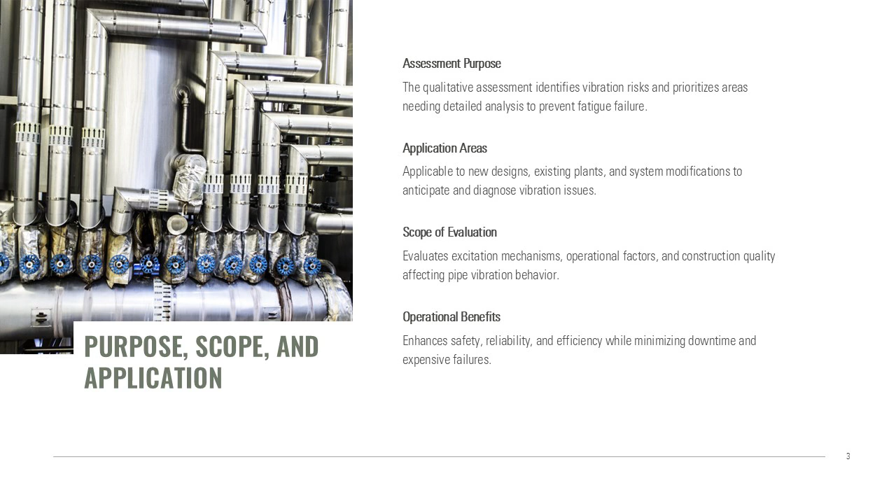The scope of this methodology includes evaluating excitation mechanisms, operational factors, and construction quality, all of which influence vibration behavior. By systematically applying this approach, organizations can enhance safety, reliability, and operational efficiency while minimizing downtime and costly failures.

Assessment methodology, excitation and condition factors. The methodology for qualitative assessment combines two primary sets of factors, excitation factors and condition/operational factors. Excitation factors include mechanisms such as flow-induced turbulence, pulsation from reciprocating machinery, cavitation, flashing, and surge caused by fast-acting valves. Each factor is scored as high, medium, or low based on its potential to induce vibration.

Condition and operational factors, such as construction quality, maintenance effectiveness, cyclical operations, and frequency of process upsets, are also evaluated and assigned a score. These scores are aggregated to identify critical areas requiring further analysis. The process involves reviewing design documents, operational history, and conducting visual inspections for existing plants.

Flowcharts provided in the guidelines illustrate how these factors interact to produce a prioritized list of systems for quantitative assessment. This structured scoring system ensures consistency and objectivity, enabling engineers to focus resources on the most significant risks.

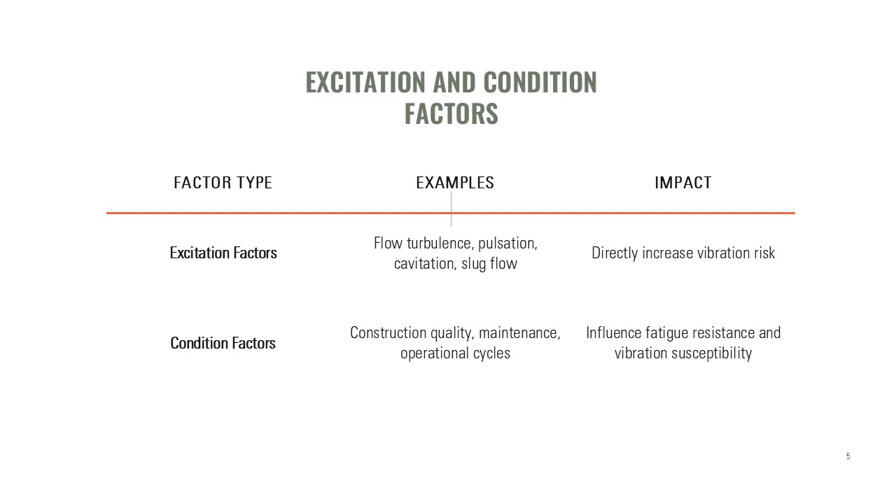Excitation factors. Number 1, fluid kinetic energy. Meaning, higher fluid velocity or density increases energy in the flow. Why it matters: creates stronger turbulence, leading to higher pipe vibration risk. For gases, leading to larger pulsation forces. For liquids, leading to higher surge pressure during valve closure. Special note: sometimes the highest fluid kinetic energy comes from bypass/recycle lines that don't appear on PFDs. These should be checked.

Excitation factors. Number 2, choked flow or sonic velocity. Meaning, gas reaches sonic velocity at restrictions, valves, orifice plates. Why it matters: produces high-frequency acoustic vibration. Shock waves may form downstream, causing acoustic fatigue.

Excitation factors. Number 3, rotating or reciprocating machinery nearby. Meaning, pipework connected to or close to mechanical equipment. Why it matters: reciprocating machines create strong mechanical excitation. Rotating machines may also transmit vibration. Rule of thumb for close: offshore, same deck or module, above or below. Onshore, within radius equal to skid length.

Excitation factors. Number 4, positive displacement pumps or compressors. Meaning, equipment that pushes fluid in pulses. Why it matters: can generate significant pulsation-induced vibration. Even screw compressors sometimes show pulsation issues.

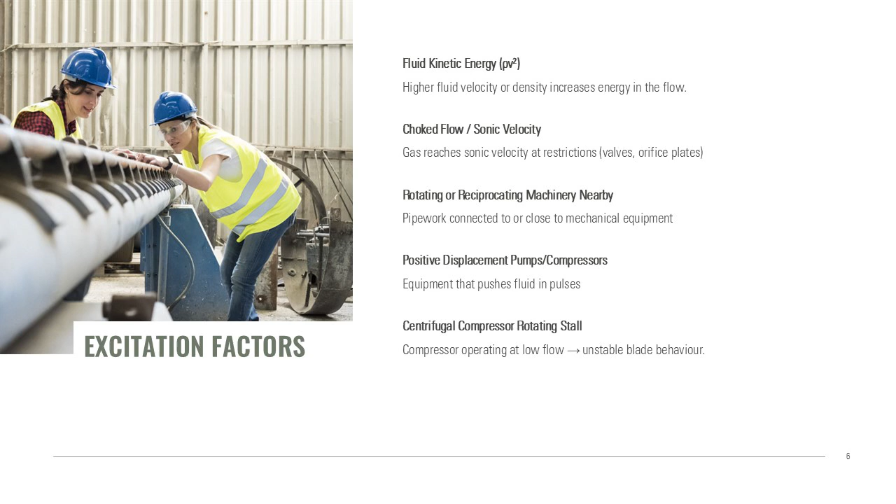Excitation factors. Number 5, centrifugal compressor rotating stall. Meaning, compressor operating at low flow, leading to unstable blade behavior. Why it matters: produces pressure pulsations, leading to high vibration risk. Note, vibrations may occur when operating near surge line unless anti-surge controls work properly.

Excitation factors. Number 6, cavitation or flashing. Meaning, liquid turning to vapor due to pressure drop or temperature increase. Why it matters: flashing, sudden volume change, leading to transient vibration. Cavitation, collapse of bubbles, leading to intense vibration. Check areas with significant pressure drops: valves, orifice plates, pumps, fluid mixing points, increased temperature approaching vapor pressure.

Excitation factors number 7, fast-acting valves. Meaning, automatic valves that open/close quickly. Why it matters: fast closure in liquids leads to surge pressure, high transient vibration. Fast opening leads to sudden momentum change. Valves to assess: ESDV, FCV, PCV, fast closing, BDV, RV, fast opening. Manually operated valves can be ignored.

Excitation factors number 8, intrusive elements, thermowells, probes, etc. Meaning, objects inserted into the flow. Why it matters: may cause vortex shedding, leading to vibration and potential failure of the probe. Excitation factors number 9, slug flow potential. Meaning, liquid-gas multiphase flow with intermittent slugs. Why it matters: creates severe unsteady forces and transient vibration. Recommendation: seek specialist analysis due to complexity.

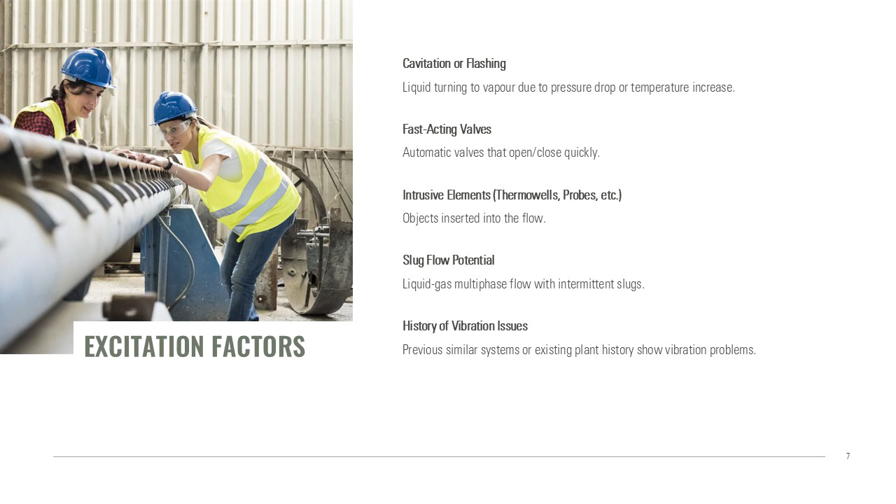Excitation factors number 10, history of vibration issues. Meaning, previous similar systems or existing plant history show vibration problems. Why it matters: indicates higher likelihood of repeat failures. Check whether previous corrective actions were effective and applied across full operating envelope.

Condition and operational factors number 1, construction quality. What it means: how well the piping was fabricated, welded, supported, and installed. Impact on vibration: better than industry standard, impacted to low risk. Well-built piping handles vibration better. At industry standard, impacted to medium risk. Normal construction may have typical weak points. Below industry standard, impacted to high risk. Poor welds, poor alignment, or bad supports greatly increase vibration fatigue risk.

Condition and operational factors number 2, maintenance and corrosion management. What it means: how well the plant maintains equipment, performs corrosion checks, and repairs defects. Impact on vibration: better than industry standard, impacted to low risk. Good maintenance prevents deterioration that could worsen vibration. At industry standard, impacted to medium risk. Typical maintenance: reasonable but not exceptional. Below industry standard, impacted to high risk. Corrosion, thinning, or loose supports can worsen vibration and lead to failure.

Condition and operational factors number 3, cyclical operations. What it means: whether the system experiences repeated operational cycles, batch processes, frequent flow or pressure fluctuations. Impact on vibration: no cyclical operations, impacted to low risk. Steady operation equals less fatigue accumulation. Yes, there are cycles, high risk. Repeated cycles cause recurring dynamic loads, accelerates fatigue.

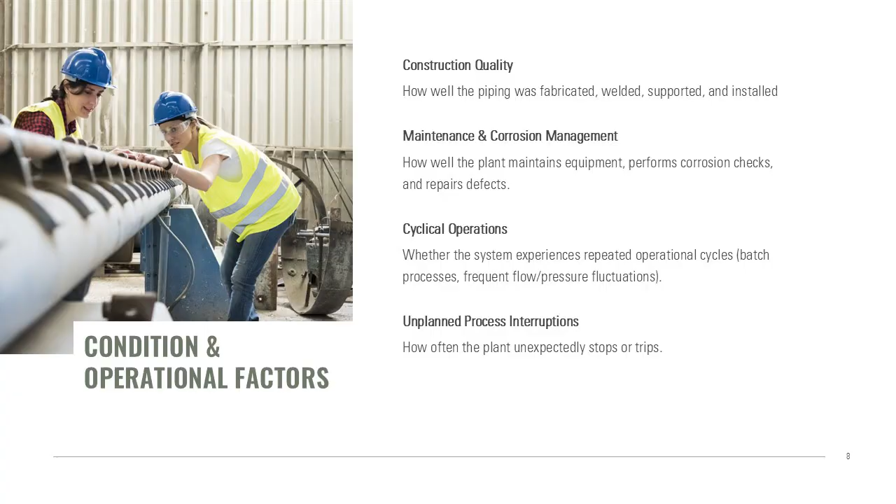New design considerations, existing plant and change management. For new designs, qualitative assessment focuses on predicting potential vibration issues before construction. Engineers should review similar projects and incorporate lessons learned to avoid repeating past mistakes. The assessment prioritizes systems that are safety critical or business critical, ensuring that these areas undergo detailed evaluation. Factors such as anticipated fluid velocities, machinery configurations, and valve operations are analyzed to identify excitation mechanisms.

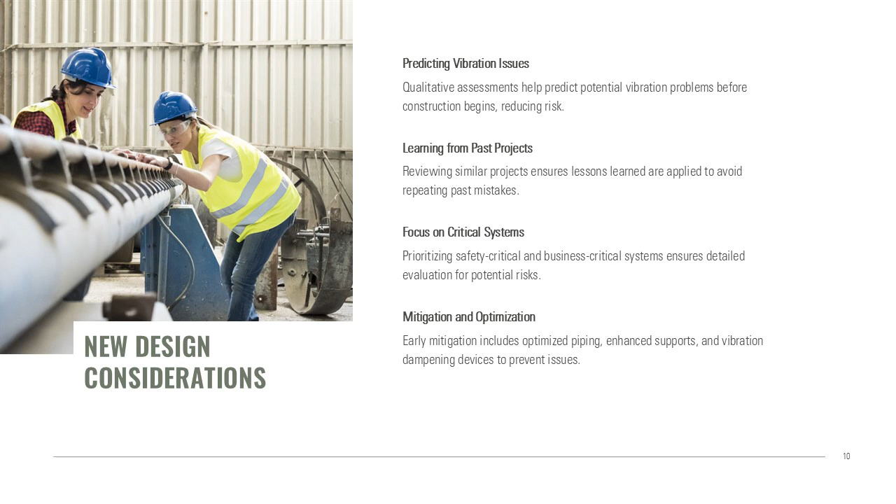By addressing these issues early, designers can implement mitigation measures such as optimized piping layouts, improved support structures, and vibration dampening devices. This proactive approach reduces the likelihood of costly retrofits and operational disruptions after commissioning. For existing plants, the assessment begins with a visual inspection to identify as-built conditions and any signs of vibration-related damage. Historical data on vibration incidents and corrective actions are reviewed to understand recurring issues.

When changes are proposed, such as process modifications or equipment upgrades, the assessment evaluates whether these changes could introduce new vibration risks. This includes analyzing variations in flow velocity, fluid properties, and operational configurations. The process integrates with HAZID and HAZOP studies to ensure comprehensive risk management. By systematically addressing these factors, operators can maintain plant integrity and prevent failures during operational changes.

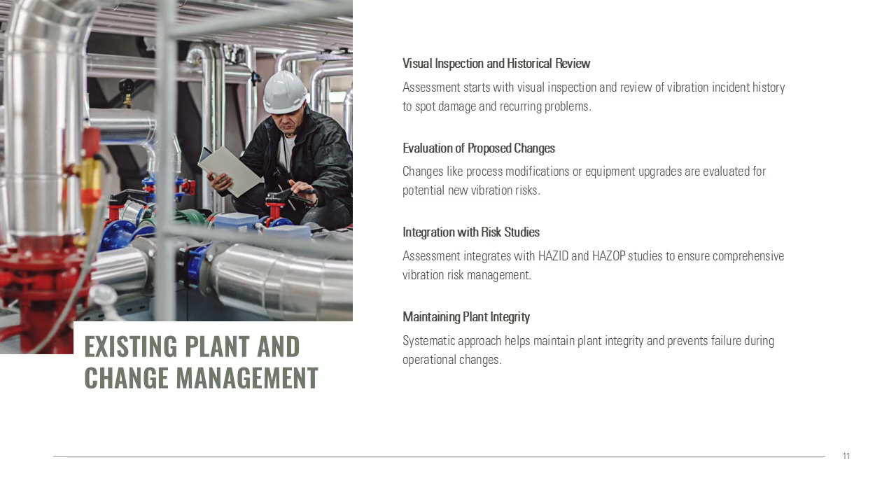Key excitation sources, condition and operational influences. Excitation sources are the primary drivers of vibration in piping systems. These include flow-induced turbulence, which occurs at high fluid velocities, and pulsation from reciprocating or rotating machinery. Cavitation and flashing in liquid systems can generate transient vibrations due to sudden phase changes. Fast-acting valves, such as emergency shutdown or blowdown valves, can cause surge forces and momentum changes. Intrusive elements like thermowells may lead to vortex shedding, while slug flow in multiphase systems can create severe dynamic loads.

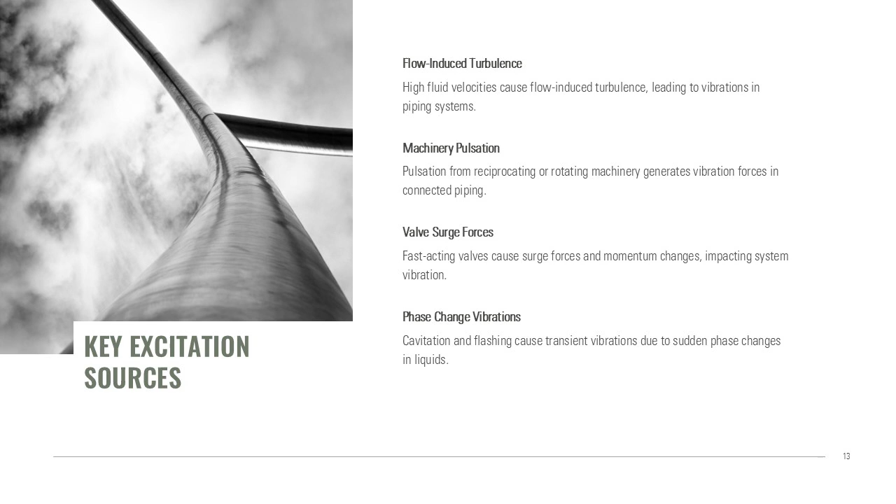Identifying these sources is critical for determining which systems require quantitative analysis and implementing design or operational controls to mitigate risks. Condition and operational factors significantly affect a system's susceptibility to vibration-induced fatigue. Poor construction quality can compromise structural integrity, while inadequate maintenance and corrosion management exacerbate weaknesses. Cyclical operations, such as batch processes, introduce repetitive dynamic loads, increasing fatigue risk. Frequent process upsets or unplanned interruptions can cause transient high-amplitude vibrations.

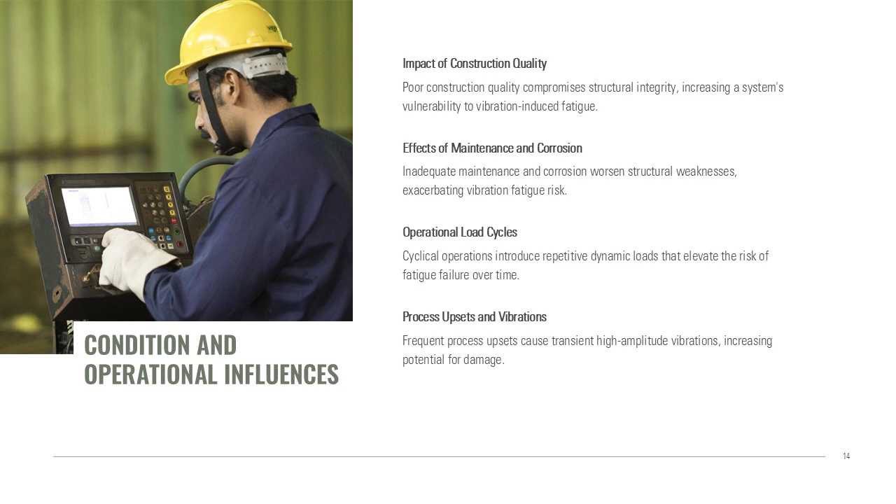These factors must be considered alongside excitation mechanisms to provide a holistic assessment. By improving construction standards, implementing robust maintenance programs, and minimizing operational variability, organizations can reduce the likelihood of vibration-related failures. Results and next steps. The outcome of the qualitative assessment is a prioritized list of systems based on their vibration risk profile. Systems with high or medium scores for excitation factors or operational conditions are flagged for quantitative analysis using advanced methods outlined in subsequent technical modules.

This prioritization ensures that resources are allocated efficiently, focusing on areas with the greatest potential impact on safety and reliability. The process also identifies specific excitation mechanisms that require mitigation, guiding design improvements and operational adjustments. Ultimately, this structured approach enhances plant integrity, reduces downtime, and supports compliance with industry standards.